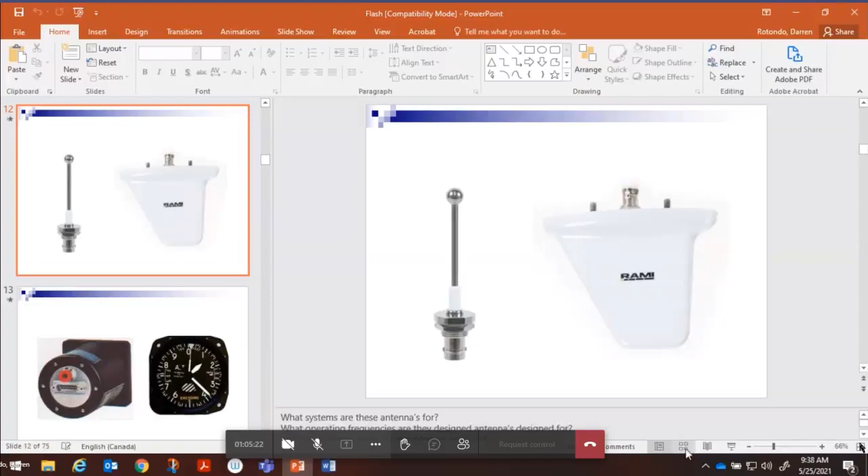Okay, so antennas, bottom of aircraft, center line, 1030, 1090 megahertz. What are those units? Well, you're never going to be able to report through your transponder your pressure altitude unless you have one of these devices.

You can have either a blind encoder, which is a device that you're going to have to feed static to, find a suitable mounting location for it. And the D-sub connector is going to need power, ground, and the rest of those pins are for the data that it formulates from the static input and then feeds over to the transponder.

For the transponder to relay to air traffic control upon request, the blind encoder, or an encoding altimeter, which is my preferred device because it would be as simple as taking out your original pressure altimeter. It's the same size, cutout, and attaching the static line to this new encoding altimeter and wiring up the D-sub connector, power, ground, and the pins that go to the transponder.

Plus, besides not having to engineer an installation for it, like you would for the blind encoder, all altimetry devices are subject to a proper bench check and calibration at an increment not to exceed 24 months, 2 years.

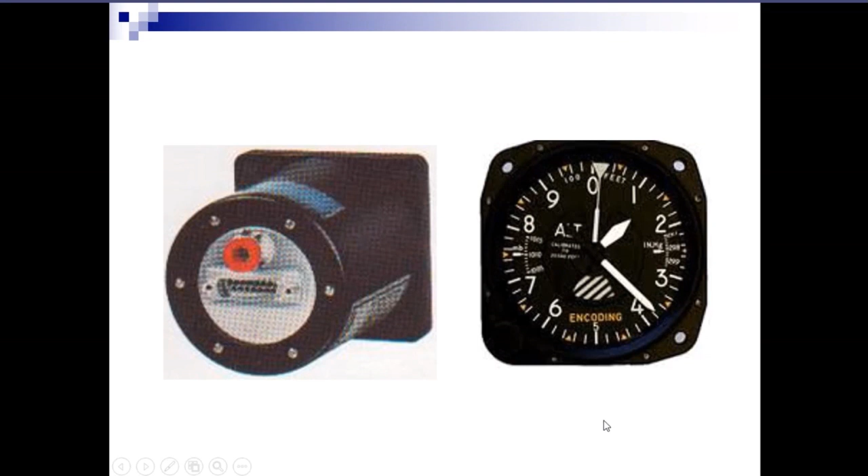When it comes to those altitude devices, unlike the transponder's code switch identification in octal, the encoding altimeter or the blind encoder, the binary language it produces is the gray code. The gray code is a code of least error, a non-weighted code, ideal when you're counting up or counting down, and that's what altitude does, okay?

You can't go from 0 feet all of a sudden to 10,000 feet without crossing every other increment. So this code is the code of least error because only one binary bit ever has to change its state as you increment or decrement in number, as you climb or come down in number. So that's why it's ideal.

What we're looking at there is what would come from air traffic control on 1030 megahertz in the form of 3 pulses, pulse 1, pulse 2, and pulse 3. That's an interrogation, a pulse train from air traffic control. How your transponder knows if that's a mode A, mode C, or even a mode S question is it looks at when it's coming in the door.

It looks at the time lapse from the leading edge of the P1 pulse when it first comes in to the time it sees the leading edge of the P3 pulse. And if it's 8 microseconds, it's a request for mode A information, so code switch information. If it's 21 microseconds, it's a request for altitude reporting.

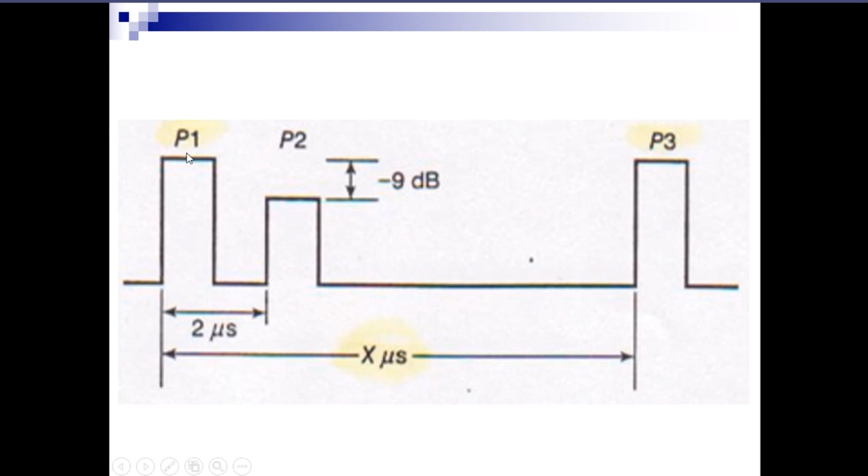So your transponder looks at the amplitude of the P2 pulse as compared to the P1 pulse, and it says to itself, if the P2 pulse is less than the P1 pulse by minus 9 dB... this power here, P1 and P3s, it's super intense.

That's going out 200 nautical miles, that's a lot of power. Even if you're inside closer to the air traffic control station, that's still a huge amount of energy that you just got hit with, your transponder just got hit with. So it says to itself, if P1 is greater than P2, so the green represents P2, by 9 dB, that's definitely greater by 9 dB, a lot of power there, then you should probably respond to that interrogation, because you are being hit by the main interrogation lobe, main beam of energy.

However, if your P1 is equal to P2, or if your P1 is less than P2, you are being hit with a false side lobe beam of energy, and you should not reply to that. So if P1 and P2 are basically the same amplitude, don't reply. Or if P2 is actually greater than P1, don't reply, because you're being hit by false energy. Only reply when P1 is greater than P2 by 9 dB.

So what's this show? It shows a third type of transponder, the Mode S transponder. They became mandatory in the United States back in 1992. Canada took a while longer, but you're not going anywhere internationally with an aircraft unless you have a Mode S transponder, a little bit better of a transponder.

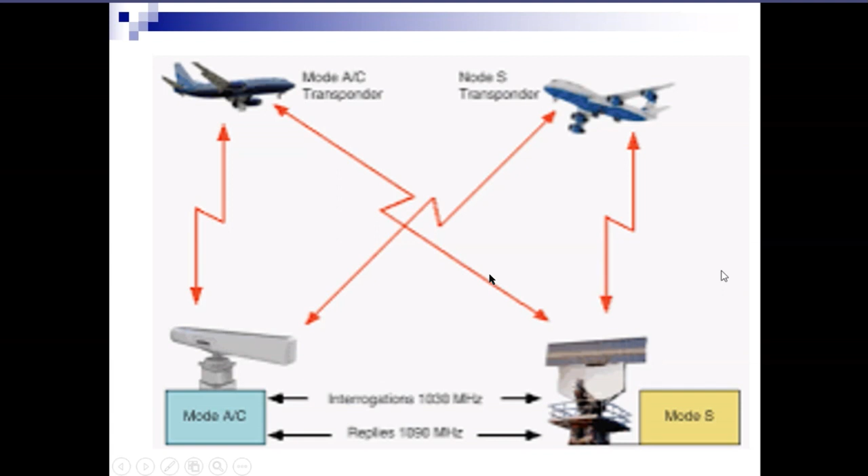So in this picture, I'm looking at that transponder. Remember, your aircraft is the replier, so your aircraft first and foremost gets interrogated. So this is... wait a second, just trying to see what this is. No, this is not transponder, is it?

And the DME system, okay, when you first turn on your DME, your distance measuring equipment in the aircraft, it starts to formulate pulse pairs. The pairs are sent on a specific frequency to the DME ground station. The DME ground station takes it in, as well as everybody else's who's sending, and delays it by 50 microseconds. That delay is on purpose because the DME ground station has to send it back to you on a different frequency and then relay it back into the sky. So it takes some time to take what's coming in from every aircraft and transmit it back on a new frequency. So the station embeds a 50 microsecond delay time into the game.

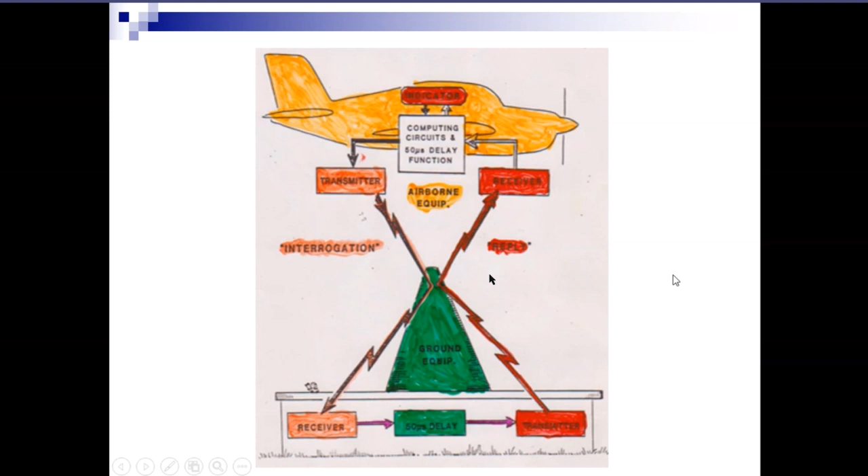So here we're seeing the pulse pairs. Every DME, when you turn it on and it starts to formulate pulse pairs, those pulse pairs are encrypted. Not the pairs themselves, but the distance between the pairs. We call that jitter, so your pulse pairs are jittered.

Everybody's pulses are jittered, so they're encrypted, and they go to the ground station on a specific frequency. They get changed to a new frequency and back up. But the only way you're going to be able to recognize your particular pulse pairs is if the jitter is unique to your aircraft. It's like DNA. Think of your jittered pulse train as being only yours and nobody else's. Every time you turn a DME off and turn it back on, it creates a brand new jittered pulse pair rate that's only unique to your particular DME unit.

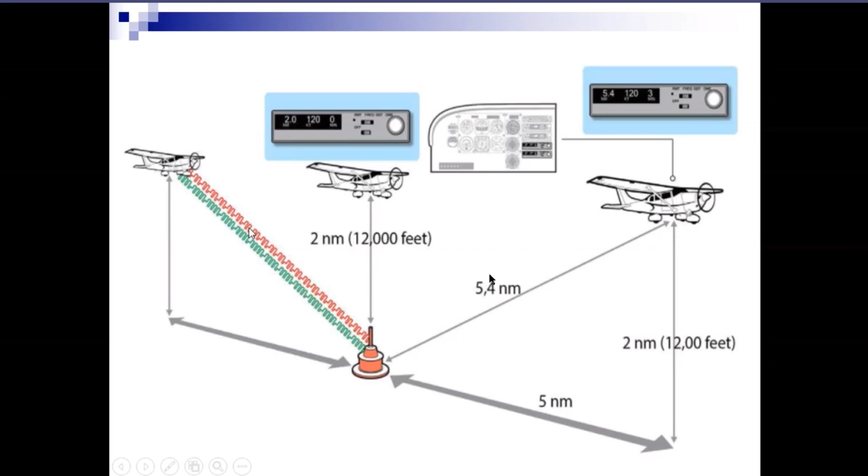Okay, we went through that. And the reason I showed that picture is because I'm going to ask you, which of those antennas would be suitable for DME? Because those are not all DME antennas.

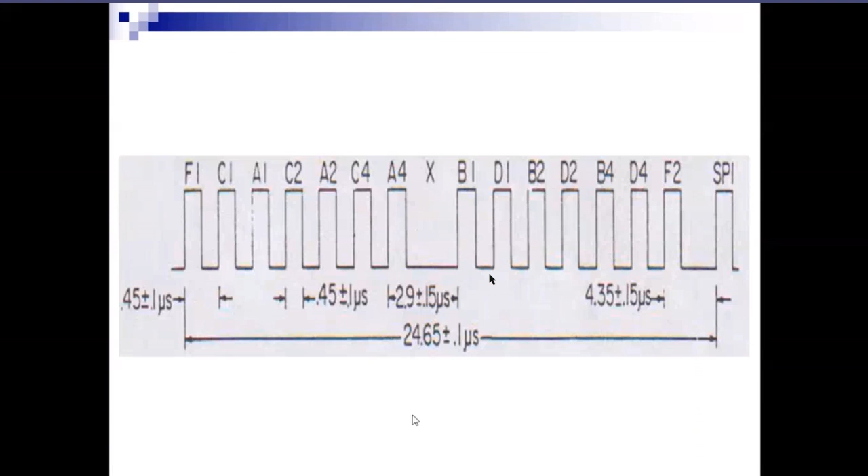So the answer to this question is, well, I'm pretty sure the DME uses the same antennas as the transponder did. Let's go back to the transponder, and the transponder was using those. So the spike and the blade are interchangeable. They can be used for transponder or DME, these types of antennas, okay?

Canadore, on our aircraft in the hangar, they've sort of created a rule of thumb. We'll use the spike for all transponder systems, 1030, 1090 megahertz, and we'll use the blade for the DME radios in the aircraft. So when somebody looks under the aircraft, they say, oh, the spike, that belongs to the transponder. Oh, the blade, that belongs to the DME.

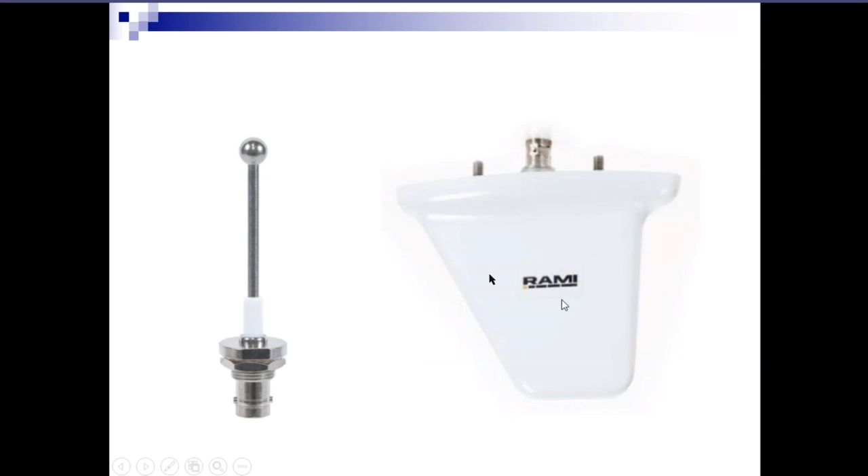Just sort of what Canadore did. It would have been better, though, to have bought for a transponder or a DME two of the blades, because they're more protected against erosion from the outside world. So the answer to this question here is, which of these antennas is suitable for DME, and for that matter for transponder? It's the spike and/or the blade.

These other two flat ones, oh, I believe those are for a system that looks and talks to satellites. I'm thinking it's GPS. Those are the two. Global positioning.

Okay, here's a popular instrument we've talked a lot about over the course of the term, a little bit last term. A glorified nav indicator I keep referring to as a HSI, a horizontal situation indicator. But this HSI is a little fancier, okay?

It's got a built-in DME display on the top, which is kind of nice considering you're flying usually to a station, a VOR station or an ILS station. And wouldn't it be great if on the same instrument you're using to navigate with, the distance to that station, your ground speed, and your time to that station also get displayed right on the same instrument? Sure, that's the way to go.

Okay, so if I asked you, besides this HSI giving me DME information and DME readout, what else does it provide? Well, the answers are quite clear. I see 5 dots that way, 5 dots that way, and I see a needle. It might not be propped up straight, but anytime I see 5 dots and a needle, that's a VOR indicator. Or on approach, that's a localizer indicator.

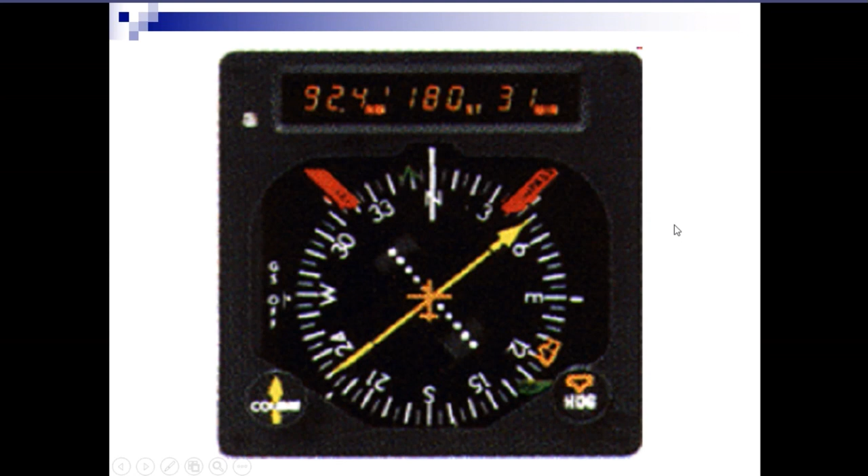And if I'm not badly mistaken, I see a little arrow here in green. That may actually be an ADF pointer. Can't see it 100%, but it may actually provide ADF as well. So what's this piece of equipment? Well, that's the piece of equipment.

That's the ATC 600A that we used to do both transponder testing and DME testing. I'm looking at it right now, and I can see that it's in DME mode right here. And I'm looking at a velocity or a distance being displayed. So it's in the DME mode right now.

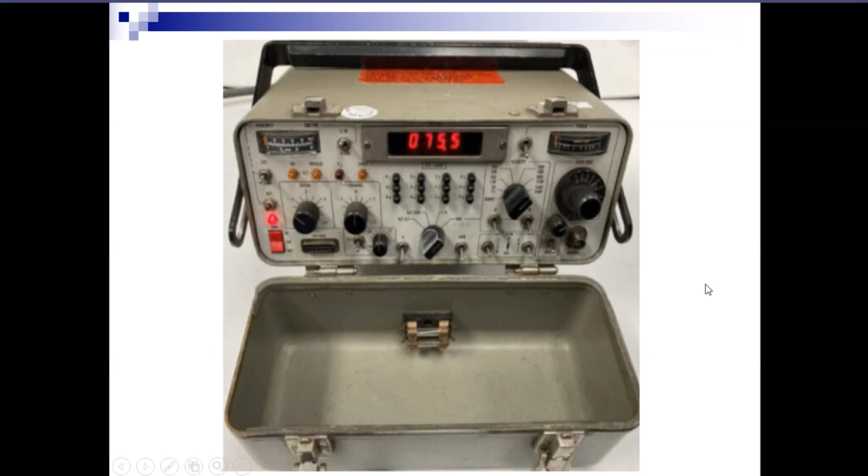Now, again, if you're looking at third-year avionics, they use that, but the newer equipment is this digital equipment, the IFR 6000. It's pretty nice. It not only does transponder and DME, but it does TCAS, it tests TCAS as well, and Mode S transponder. So that's sort of where things are moving. The equipment's getting better.

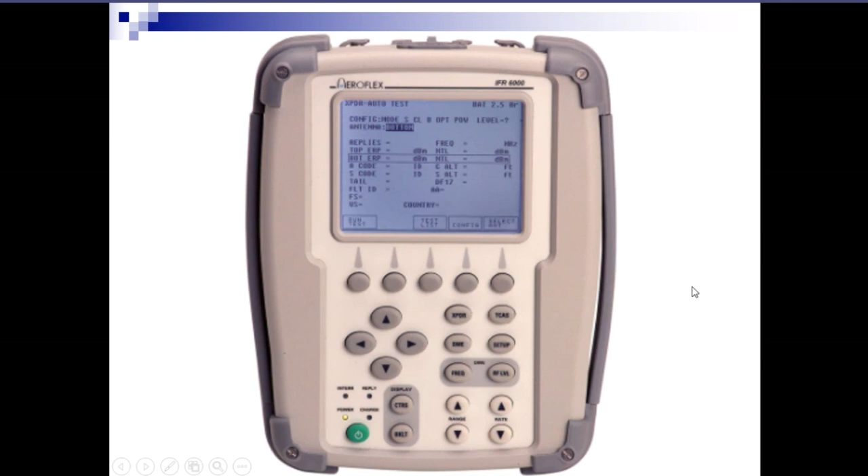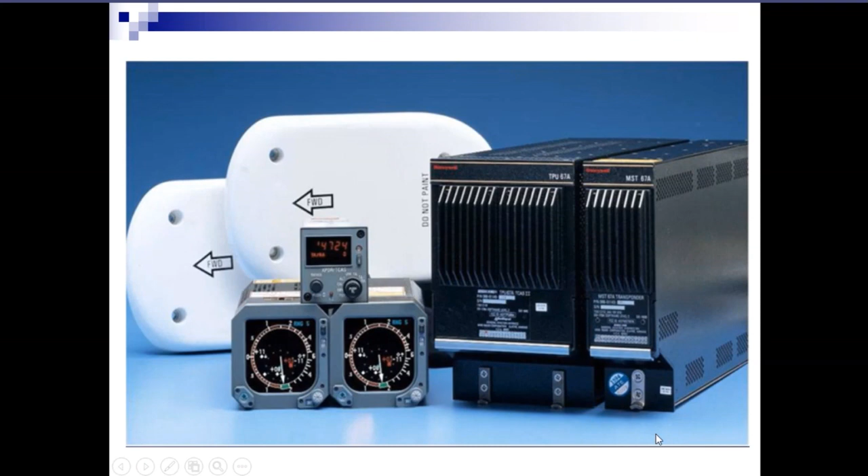Speaking of TCAS, there's our TCAS system now, traffic alert and collision avoidance system. This is a pretty fancy one. I've got two, it looks like TCAS 2 displays, one for the pilot side, one for the co-pilot side, a Mode S transponder as part of the system, a top-mounted TCAS antenna and a bottom-mounted TCAS antenna, because I kind of want to see people above me and below me that are heading towards me.

When it comes to TCAS, think of it like the game of Crash Bandicoot. Your aircraft has a CPA, a closest point of approach, with a bubble around it. That bubble, whether viewed from the side or top down, is about 2 nautical miles wide with you at the center, and about 750 feet deep. If any aircraft in your vicinity gets close to your bubble, your closest point of approach, you want to know so you can take evasive action.

When it comes to TCAS, there are really two types of systems. There's TCAS 1, required on commuter aircraft, which only gives you TAs. What's a TA? No, not a teaching assistant - a TA is a traffic alert. A TCAS 1 system lets you know when somebody is encroaching on your closest point of approach, about 35 to 45 seconds from impact to your bubble - not to you, but to your CPA.

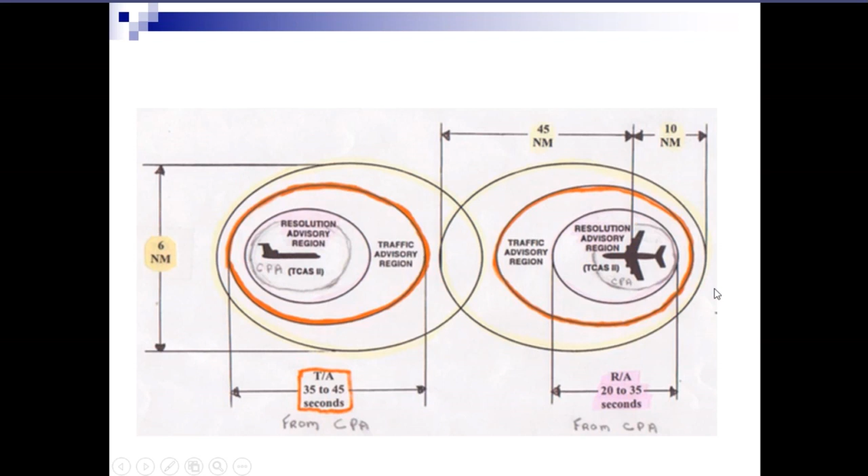Whereas a TCAS 2 system not only provides traffic alerts when folks are 35 to 45 seconds from your bubble, but if they get any closer, within 20 to 35 seconds of your bubble, it'll spawn a resolution alert and a proposed fix, either a climb or a dive, or a stay-where-you-are command, to help you get out of a tricky situation. So right there, that's definitely a TCAS 2 display.

The way TCAS 2 works is they decided to use basically a vertical speed indicator, a rate of climb indicator, to provide resolution advisories or alerts. It prompts you, in color, to either climb or dive to rectify the situation.

So looking at this screen, this aircraft over on the left is not a problem for me - it's minus 12, meaning 1,200 feet below me, and it's basically even going lower, with a down arrow showing it's descending. This aircraft on the right is proximate traffic, which could be a problem in time, but it's still below me, looks like 600 feet below and descending as well.

It's this aircraft here, sort of in front of me, between 12 and 1 o'clock, that's the real concern. It's a scary color - red and a square. It's 300 feet below me right now and descending, so it's going down.

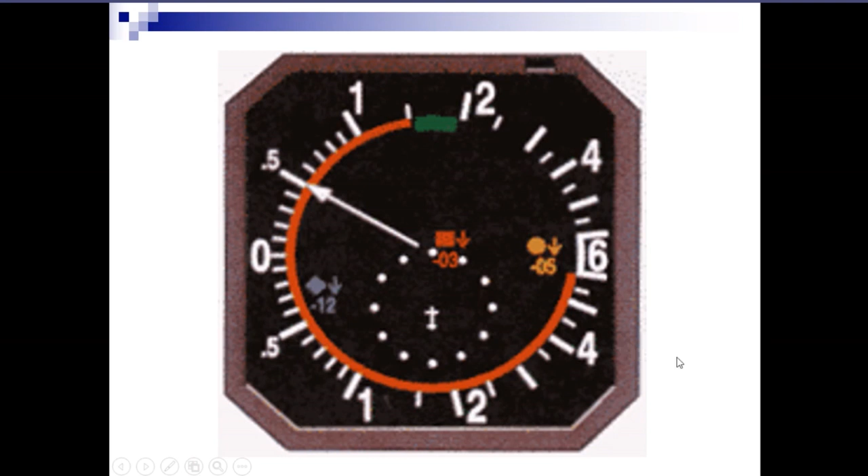But when it comes to the GPS system, remember who owns it, and that might be a problem. It's owned by the American military. The Navstar GPS system is owned by the American military.

It's broken down into 3 segments. The control segment: ground stations basically monitor the satellite performance, and they can make adjustments as necessary to maintain the accuracy of the satellite signal, or not. Keep that in mind.

The U.S. military can use selective availability. They can shut you off. They can skew its accuracy at will. They won't do that unless they're told to, and the only way they'd probably be told to do that is if we were in a time of war.

So that includes the control segment and the space segment. There are 24 satellites as part of the Navstar GPS system. The 24 satellites are in 6 orbital planes, with 4 satellites in each of the 6 planes. 4 times 6 is 24 satellites. That makes up the space segment.

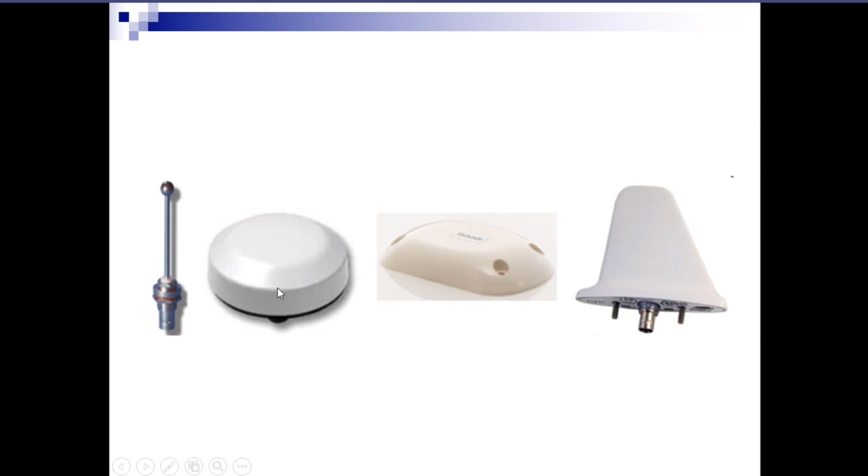Which antennas would be GPS? Well, this one's in the middle — those nice little flat ones in the middle are GPS antennas. The other two, on the left and right, are either transponder or DME, your choice.

We'll leave it at that, and we'll pick it up next week when we're finishing this review. We'll pick it up at radar altimeter.